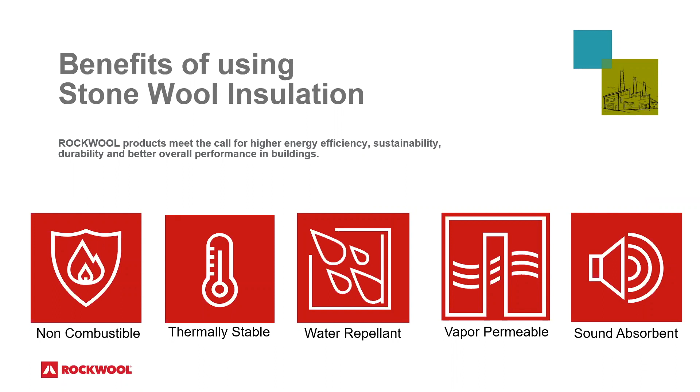When it comes to stone wool insulation, which we're going to talk about once this program starts, really the low hanging fruit of the benefits here is the non-combustibility aspect. As we're starting to build bigger buildings, we have to be cautious of using combustible materials. Stone wool insulation compared to some of the foams out there has a great statement around non-combustibility - no flame spread, no smoke development. But in addition to that, it's a very thermally stable product, maintaining its R-value over the life of the building. We'll get into water repellency and the importance of vapor permeance, which is critical for high performance buildings like passive house buildings, particularly here in the Northeast, to allow these buildings to dry. And then the acoustic qualities - sound absorbency of stone wool insulation is quite good, and we'll get into why that is as we go.

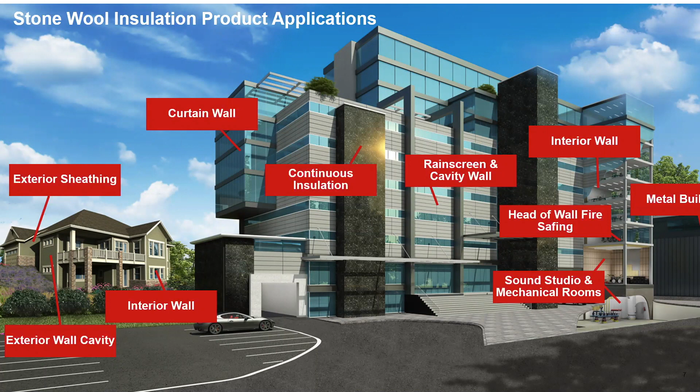Just to be clear, you guys might be familiar with all the various applications for stone wool, or you might not. It's not just a batt insulation that we use - we're actually able to manufacture semi-rigid and rigid products that can apply to all sorts of applications on buildings, from continuous insulation boards to curtain wall assemblies to acoustic semi-rigid boards for metal buildings or sound studios, as well as rigid boards for low slope roofs, as well as under slab below grade foundation walls. So there's a lot that you can get into with stone wool, and we'll get into that here in a second.

Rockwool has been around for quite some time. We started in the 1930s in Denmark. We opened our first facility in North America in 1988. And now we're just breaking ground - or I should say we have broken ground - on our fifth manufacturing facility. It'll be open next year in Ranson, West Virginia.

So we're the leader in stone wool insulation supply globally, and certainly here in North America. But we'll have some more product discussion at the end of the presentation.

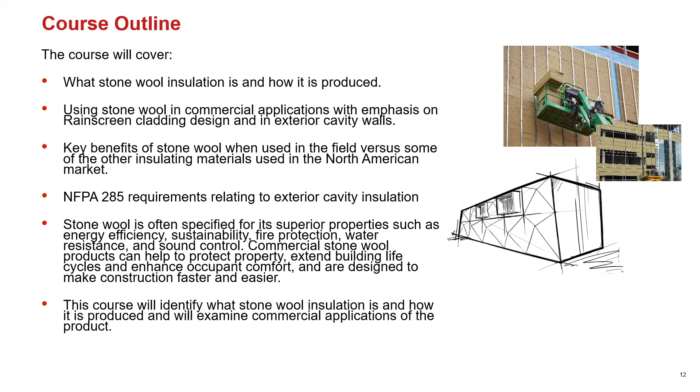All right, so again, this is kind of like a 101 on stone wool. We're going to talk about what is stone wool, maybe clarify the difference between what we call stone wool and what you might recognize as mineral wool, and what those differences are. And then we'll get into the attributes and the benefits of why you might want to specify stone wool versus some of the other products that are out there in the market.

And we'll get into some applications, in particular exterior wall applications and roofing applications, which I think is, for the most part, the most pertinent to commercial insulation as it pertains to passive house applications.

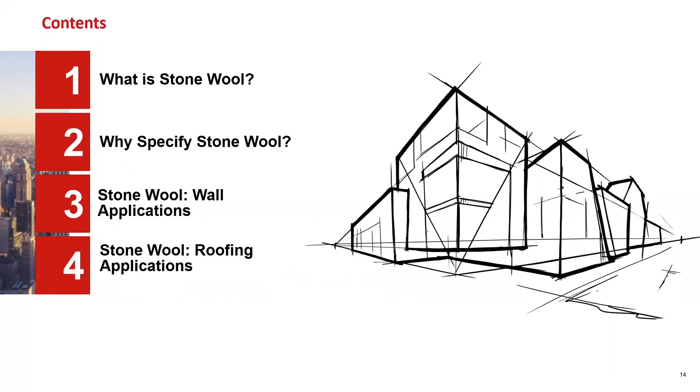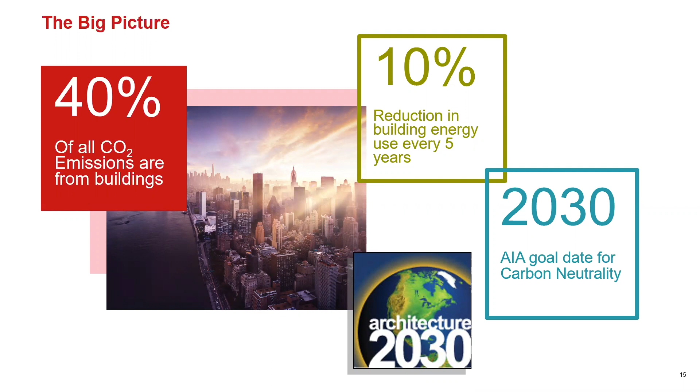Buildings need to be the primary focus, and that's going to include not only new buildings, but also existing buildings, right? So most of the energy use is coming from our existing building stock. So I think retrofit is going to be a big topic here, if you're not aware of that already, that we need to be thinking about.

But when we think about optimizing air tightness and adding insulation to create a passive approach and high performance building, we do need to think more than just climate change as it pertains to reducing energy use and reducing the impact of carbon emissions.

I mean, there's a lot of things going on in our environments today, from tornadoes, floods, fires, all sorts of durability challenges and issues need to be addressed through the selection of products and materials to also help meet those energy goals. And so when you look at insulation, particularly commercial insulation, you have various types that you can consider.

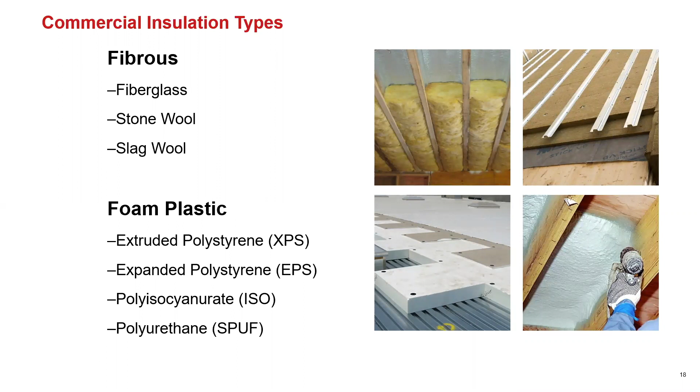And we'll categorize the two main typologies as fibrous insulation, which would include your standard fiberglass, stone wool and slag wool, right, in the mineral wool segment. And then you've got foam plastics, which could have rigid boards like XPS, EPS, polyisocyanurate, or you could look at the spray foam class, like open cell or closed cell spray foams.

And so quickly looking at rigid foams as a selection for products in buildings and commercial buildings for continuous insulation. In general, these are closed cell type products. They do use blowing agents, whether or not we're looking at polyisocyanurate, expanded polystyrene, or EPS or XPS, and the blowing agents will vary, right?

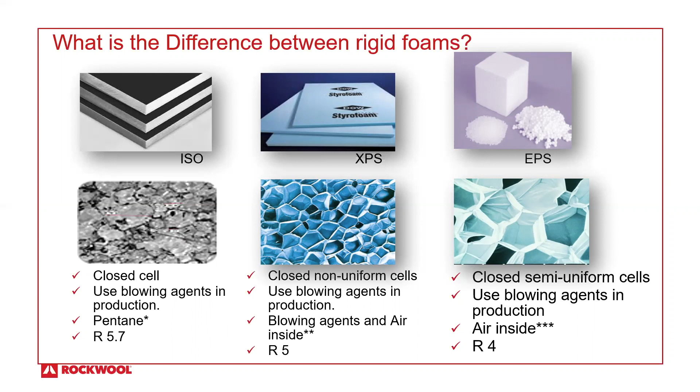In polyiso, you're looking at a pentane gas, that's going to get you to about an R5.7 nominally. You have blowing agents and air inside of XPS. You have some air in the EPS products that'll get you to about an R5 and 4 respectively. So I think the key thing here is to notice that these are nominal R values. We're going to get into really the focus on effective or long-term performance R values as we go.

And so when you look at stone wool, what is stone wool? And to again try to demystify things, we'll create the umbrella review here. So a mineral fiber is the generic term for any sort of fibrous inorganic substances, and that mineral fiber can then be classified into three groups.

So one is fiberglass, which I think we're most familiar with. The pink low density products that you'll see quite often in between studs, wood studs, sometimes metal studs.

And then you have the category of mineral wool. Under that category you have 2 subcategories, which include stone wool and slag wool. Stone and slag are the 2 primary ingredients in a mineral wool product. The differentiator here is if you have more stone basalt rock within the makeup of that product, it's considered a stone wool. If you have more slag, then it'd be considered a slag wool.

Slag is the byproduct of iron ore when you're producing steel, so that's really the recycled content. It's a little bit different in terms of the makeup versus the basalt rock. We just want to categorize and showcase the differences.

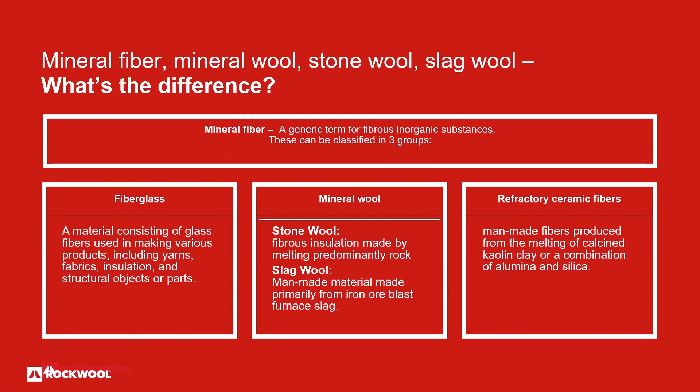So what we're going to be talking about today is more in the stone wool segment than in the slag wool segment. The third overarching category is refractory ceramic fibers, which are high temperature insulation materials often used in industrial applications for piping and things of that nature. It's rare that you'd see that as a specified product in commercial insulation, so really the fiberglass and mineral wool products are where we start our focus.

I traditionally have a video to show groups. Decided not to include that in this presentation because it's a little lengthy and can get chopped up in the transition to Zoom. I might forward that to you guys afterwards, but it's a video from the Discovery Channel that showcases how the mineral products and stone wool products are made. I'll just go over it here quickly.

So I mentioned the combination of raw materials of basalt rock and steel slag. You basically heat those up to the point of melting, so it does get to some high temperatures. Then as that stone slag combination starts to melt, it's spun into fibers. It's not too different from the production of cotton candy, but in this case we're looking at stone.

Those fibers can be collected into either lower density bats or into higher density boards. We'll get into the specifics on why we'd do one over the other and how those products are used.

You want to look at the individual products and make sure they're right for the application, the specification. Typically products that are going to interface water are going to be either semi-rigid or rigid - they might have specific binders to interface better there. The lower density products like bat insulations are usually meant for interior applications, so you don't want to mix those two up.

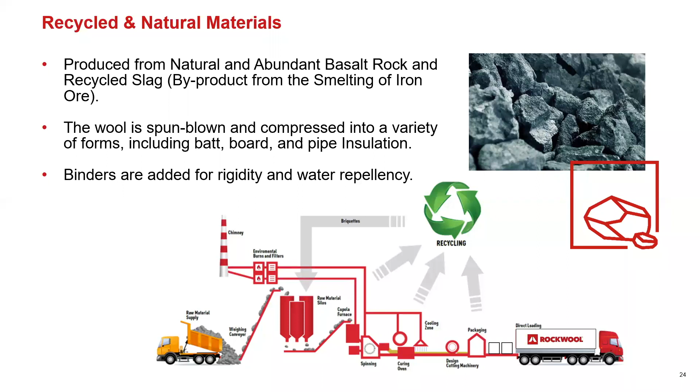But on this line here, one of the benefits certainly is that any product that falls off the line can then be thrown back into the raw material silos for production. So very little waste to landfill in the production of stone wool insulation - basically all the material can be recycled back into the production line.

There's a number of different applications for stone wool in the commercial realm - from curtain wall assemblies, fire safety at edge of slab, trying to meet UL rated assemblies for these curtain walls, which we don't see too much on Passive House, but there's certainly still a lot of it going on. We can use it for metal building, for standing seam metal roofs, for low slope roofs, and for continuous insulation on the outside of traditional rainscreen walls, masonry walls, things of that nature.

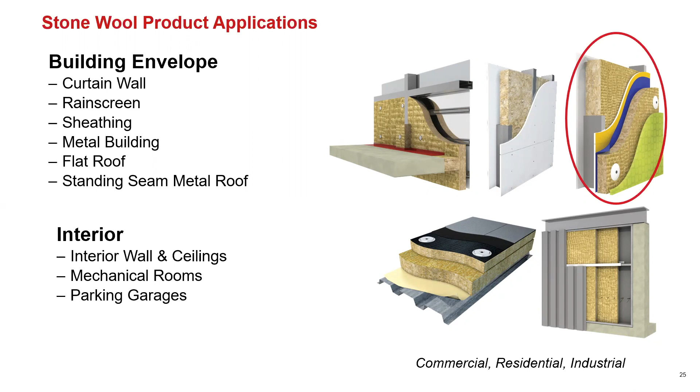On the interior, we can also do walls and ceilings, mechanical rooms, parking garages as well. A lot of those are specified for acoustical or fire reasons, and there's a lot of good data around that in both commercial and residential as well as industrial uses.

So why would you want to specify a stone wool insulation? There's a number of reasons. We're going to start with fire, which we've mentioned already in terms of fire resistance. For those of you who don't know, stone wool insulation is fully non-combustible.

There's zero flame spread and smoke development with stone wool products, whether we're looking at batt insulation or board insulation. So when you start to compare this product to some of the other rigid foams or spray foams or even fiberglass, stone wool will melt eventually.

It melts at 2150 degrees Fahrenheit, and that takes about 6 hours in a full-on fire to get to that level. So it offers a tremendous amount of protection for occupants of buildings that either need to shelter where they are or get out of the building, giving them time to do that.

It also protects the contents of buildings and things of that nature. So when you start to compare it with some of the other insulations on the market, it's not a surprise why people are starting to move towards stone wool insulation for building construction.

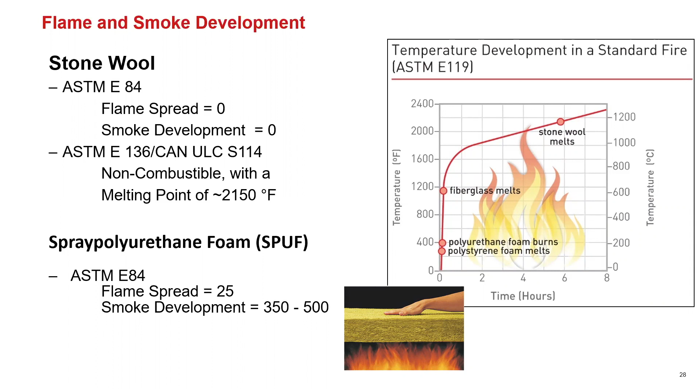In the commercial realm, I think a lot of us are familiar with some of the high-rise catastrophes that have occurred over the last decade or two with the use of foam plastics on the outside of buildings, and that could either be rigid foams, polyiso, spray foams, or even panel materials that you're specifying that might be combustible or have foam core materials.

But at the end of the day, there were, I believe, 72 fatalities, which were all due to smoke inhalation in this particular building. So as a result of this fire, the UK has banned the use of combustible foam plastic on high-rise buildings, as well as the use of combustible claddings.

And so now we're starting to see a movement in Northern Europe to use only non-combustible materials to achieve the requirements. And even here in New York City, the FDNY has started to pursue some more stringent guidelines around the use of foam plastics on high-rise buildings.

So it's in the process of review as we speak, but I think there'll be some information coming forward fairly shortly. In general, in commercial construction, we oftentimes reference an assembly test called NFPA 285.

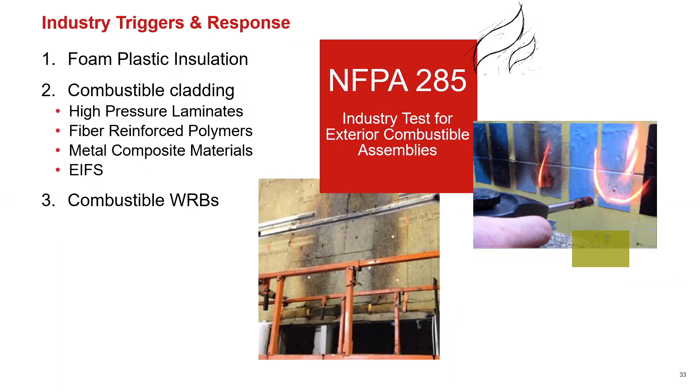And this is what that test looks like. It's a multi-story burn test, as I mentioned. I spent a number of years with a manufacturer of HPL cladding on the technical side, so I have a lot of experience dealing with this. I'm happy to answer questions at the end. But it's a complex test and quite expensive.

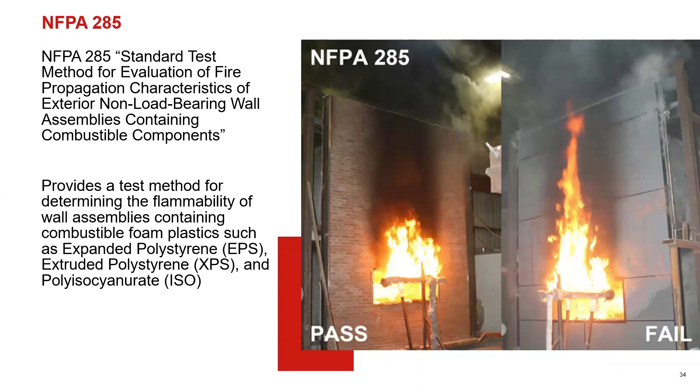So we've seen a movement towards non-combustible insulation and non-combustible cladding to avoid those types of test assemblies. But it's referenced here in chapter 26 of the IBC. And it's not just NFPA 285 that needs to be considered.

You also look at fire resistance rated walls, ASTM E119. You do have to use thermal barriers, and there's also flame spread and smoke development testing required with foam plastic insulation, which is not as critical with non-combustible materials.

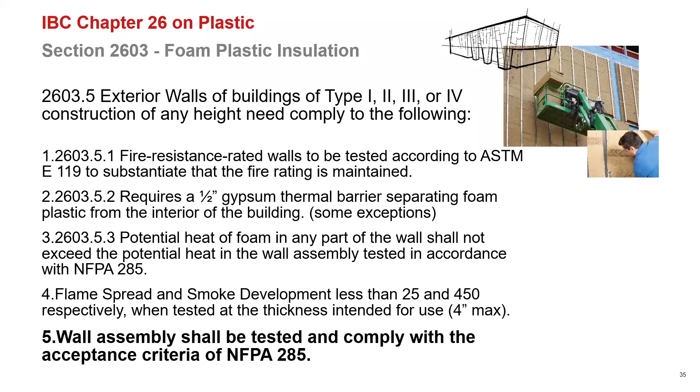So I have another video, not the one I'm referencing now, comparing polyiso to stone wool. But I thought this video was a little more relevant. This is from the UL Fire Service, given all the forest fires we've had in California and other areas of the country.

There's been a renewed focus on wildland-urban interface testing. This compares two walls: a vinyl siding wall over XPS insulation on top, and a similar vinyl siding wall over stone wool rigid insulation on the bottom. This was prompted by wildland-urban interface concerns, especially in California, where requirements for continuous insulation are increasing, raising concerns over how that integrates with fires and the use of foam plastic.

So what we're looking at here is, they started a fire at the base of each wall and measured the time it takes for that fire to enter the attic space of this wood frame construction building. We've had to push the stone wool clock fast, because after 30 minutes they ended up shutting the test down without the fire really moving past the vinyl siding.

But with the XPS wall above, in just under 3 minutes it enters the attic space, and they have to diffuse it and put the fire out. So you'll see right at 3 minutes. It's an interesting visual on why, from a fire perspective, there's been a movement toward non-combustible insulation, and I think we'll start to see these tests referenced in a lot of the codes moving forward.

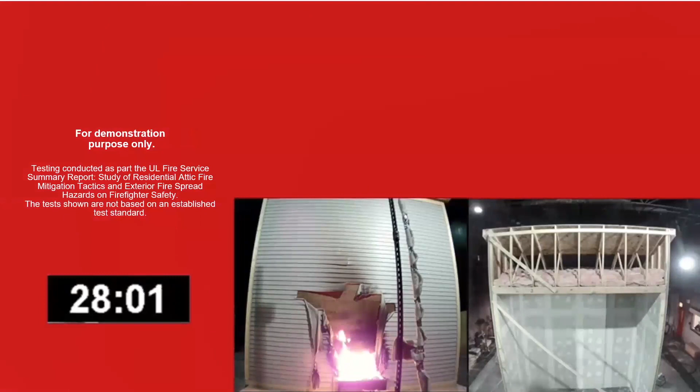All right, moving on from fire: long-term thermal resistance. Stone wool insulation is a fibrous insulation, and we consider it a very stable R value, with trapped air in the fibers helping make up the R value. A semi-rigid stone wool insulation used on the outside of buildings is roughly R-4.3 per inch, and that'll be true today and 80 or 90 years from now. There are no blowing agents, no off-gassing that's going to create any modification in that.

Now compare that to some foam insulation products on the market, particularly polyisocyanurate or XPS, which do use blowing agents, as I mentioned before. They will off-gas over time, which isn't great for a variety of reasons, but from a thermal perspective you'll see a drop in nominal R value with polyisocyanurate—up to 20%, sometime between year 2 and 20. With extruded polystyrene it's about a 10% drop, which doesn't drop them to awful levels, but it might not be what you're expecting from the specification side.

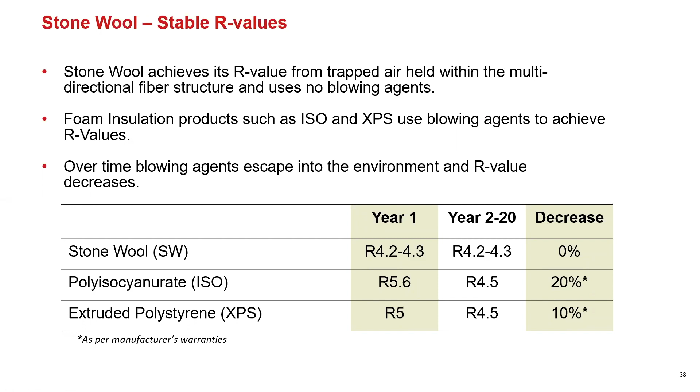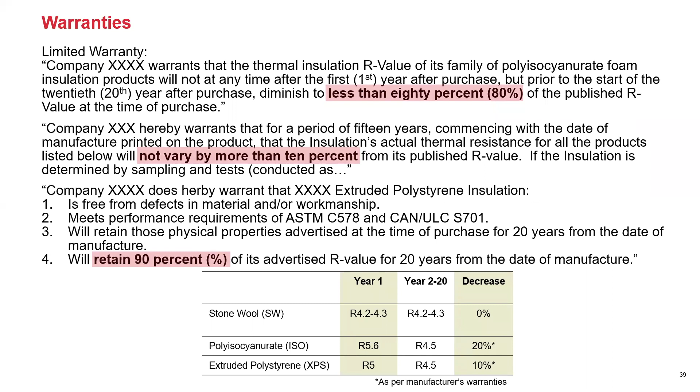As we look to make sure these buildings perform to our expectations for more than 20 years, we want to understand the long-term performance values of these products. It shouldn't be a surprise—it's in the warranty terms for a lot of manufacturers of rigid boards—but it's just something to be aware of when specifying products.

Additionally, temperature-dependent R values. If you're not aware, nominal or published R values for any insulation product are taken at a very static 75 degrees Fahrenheit in a hot box test. So those nominal R values tell you very little about how a product actually performs at different temperatures.

The one outlier is the polyisocyanurate, which at about 55 degrees Fahrenheit starts to decrease down to about 4.3, 4.4 R per inch at 0 degrees.

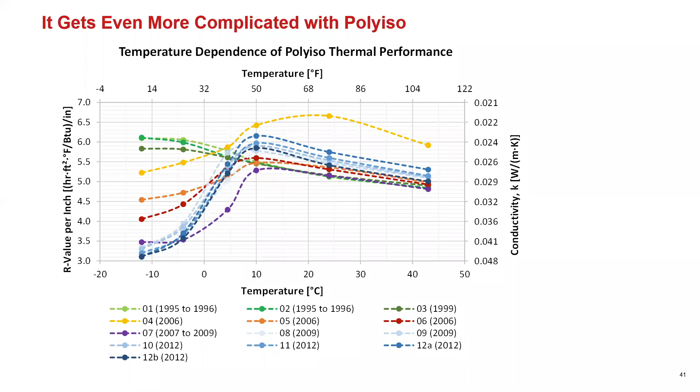So what does that mean? If you're considering stone wool versus ISO on the exterior wall for continuous insulation, you might be looking at an ISO board that's 5.6 nominal R per inch when published versus a stone wool insulation that's 4.3 R per inch, nominal R value at 75 degrees Fahrenheit.

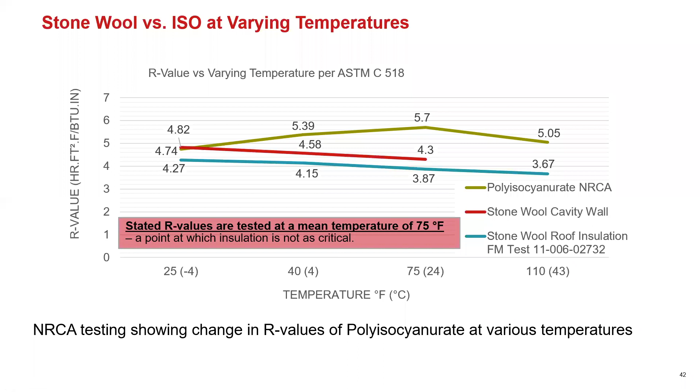However, when we drop to 25 degrees Fahrenheit, the stone wool insulation is actually outperforming the polyisocyanurate insulation as those temperatures start to drop. So it's a dynamic scenario we all need to be aware of - R values are not static, and there are things that can impact them.

Another item around stone wool insulation is in-field performance and flexibility. When we call a product semi-rigid, that's usually in the 6 pound per cubic foot range of stone wool. There's enough flex on that, even though it's a little rigid, that you can conform to radial applications, curved surfaces, and stone wool can do that quite well without leaving any gaps for convective looping behind the insulation.

We oftentimes see in these unique buildings where architects want a little bit more design freedom, but also need to meet the requirements of continuous insulation, stone wool tends to be a good option here versus some of the more rigid products on the market.

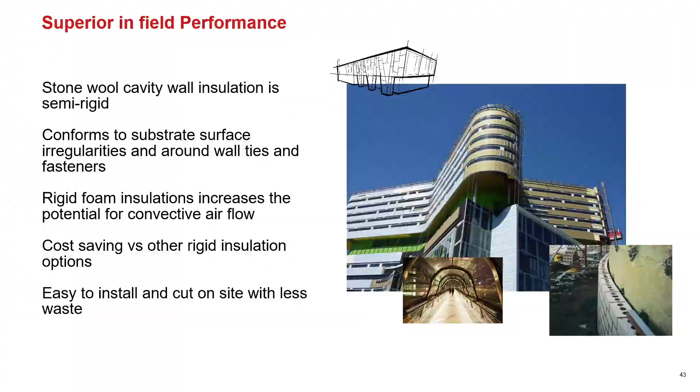All right, so now moving on to dimensional stability. Like all materials, stone wool is going to have some level of expansion and contraction due to thermal shifts. This is no different from other structural materials like concrete, steel, or rigid insulations. But what's important to note is that stone wool moves very, very little - the foam plastics are moving 12 to 20 times more in terms of expansion and contraction versus stone wool.

So what's the big deal about that expansion and contraction? Normally I ask the audience what we see here - I'll let you know in case you haven't guessed it, but this is convective heat loss. This is a building in the Northeast that has a polyisocyanurate roof, and during the cold winter months, the board starts to contract and create these gaps between the boards.

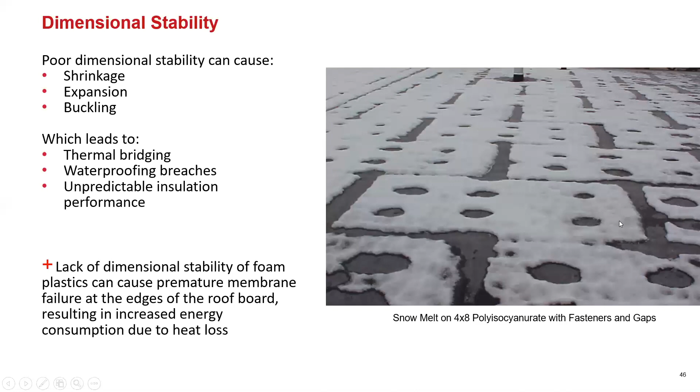And so the heated interior environment starts to leak through those gaps and starts to melt the snow on the roof. You can also see some mechanical pins that are creating thermal point bridges here as well. This means you're losing effective R value of the assembly by allowing that convective heat to come through, but you're also creating a lot of wear and tear on the roofing membrane due to that expansion and contraction. So the more we can protect that and maintain a stable R value, the better off we're going to be. Stone wool helps to promote that.

So stone wool is hydrophobic, particularly the products we're using on the exterior of buildings. We're looking at moisture absorption under 1%. It can create a very effective drainage plane. Normally when I'm presenting this live, I try to pour some water on samples so you can see it bead, but this is visually what it would look like.

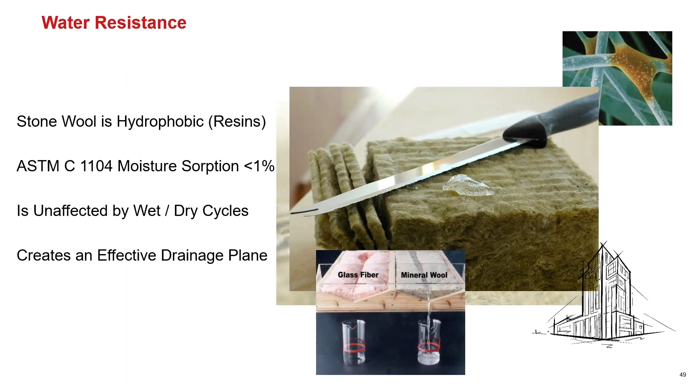You'll often see rigid boards used for foundation walls or under slab because of its ability to deflect and defer water. One thing I want to note is that because trapped air makes up the R value within the insulation, if you put this product under a constant head of water, a hydrostatic head, it will eventually take on water. The water goes through the gaps in the fibers, so it's not absorbed into the fibers. But what's beneficial is how quickly the water can drain through - if you saturate a board for 30 minutes, within 12 hours it's completely void of water.

It's important to note, as you're comparing this to other insulations like fiberglass, a stone wool batt insulation could get wet on a job site, and you let it dry out, and its R value is retained, its structure is retained, and you can still use the product. So again, it has some really good water quality components even for the batt insulation.

All right, moving on to vapor permeance. It's important to note that stone wool is not a vapor barrier - it's not going to trap vapor. It's roughly 30 perms in terms of promoting drying capacity within walls. That'll vary a little based on the thickness of the materials you're specifying, but it really does help maximize that drying potential. As we should know, a good wall design, particularly in the Northeast, should not incorporate two true vapor barriers.

We typically want to see, if we're going to have a vapor barrier like a membrane product, it should be located on the warm side of the wall. Here in the Northeast, where we heat our buildings more than we cool them, at least for now, that vapor barrier should be on the inside of the wall. So what that means is if you're doing split wall construction like we see here with some batt insulation in the studs, you've got a true vapor barrier to the inside of that.

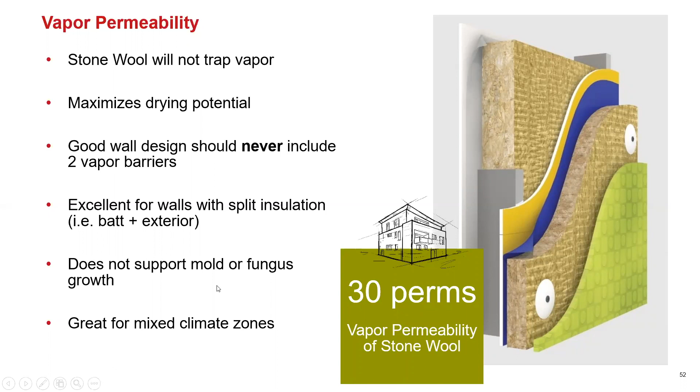Additionally, stone wool is not going to support mold or fungus. It's a completely inorganic material, and it's really good for mixed climates. This is what we want to avoid, where in the Northeast we're trying to deal with that cold climate and allow heat flow through our walls. If we specify an XPS or polyisocyanurate for better R value considerations, we might be overlooking the fact that it's vapor impermeable and compromising drying capacity of our walls.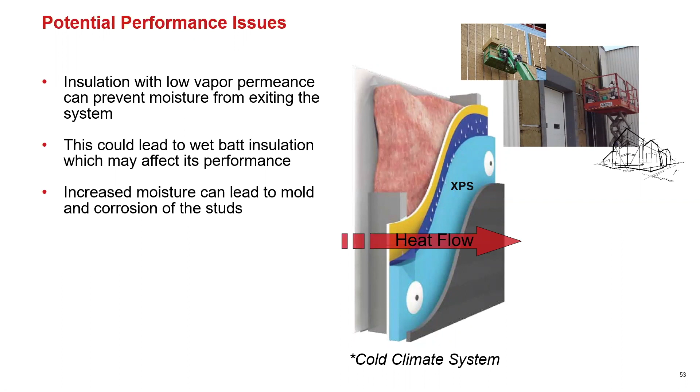So again, we want to look at using an interior vapor control layer, having maybe a vapor open stone wool batt insulation or fiberglass insulation. You've got your sheathing, a vapor permeable air barrier, a semi-rigid stone wool insulation, exterior continuous insulation, and then you've got your cladding. This is kind of an ideal way to design for vapor permeance and drying.

Just to identify this in the passive house realm, passive house buildings are being built extremely airtight and adding lots of thermal insulation. Historically, we built buildings that weren't very thermally efficient or airtight, so they'd get wet in driving rain, we'd put a fire on the inside, and we'd rapidly dry out the wall components because of air leakage and lack of insulation. As we build more thermally efficient and airtight structures, we can't rely on that heat flow as much to dry things out, so allowing for diffusion becomes really critical in high performance walls, especially in passive house type buildings.

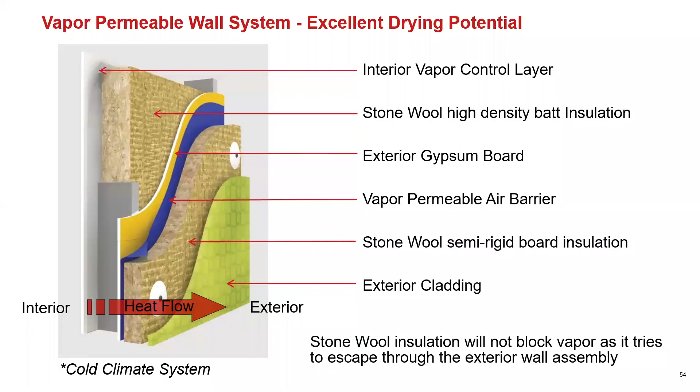All right, I'm going to move on to sound absorbency. I'll be the first to admit I'm not an expert on sound, but I'm going to try to play one right here. We've got a lot of good folks behind us to help support this.

Acoustics is complex. There's no single product that manages it all. It's oftentimes a system that needs to be considered.

The ratings you're typically referencing are STC ratings, the sound transmission class, tested in accordance with ASTM E413. The range of frequencies measured through STC is roughly 125 to 4,000 hertz, and the STC rating is a decibel reduction average across that spectrum of frequency. Just because a product has a high STC rating doesn't necessarily mean it's the best for the application, because you should be looking at what frequencies within the STC rating you're concerned with, since certain products might perform better at lower or higher frequencies.

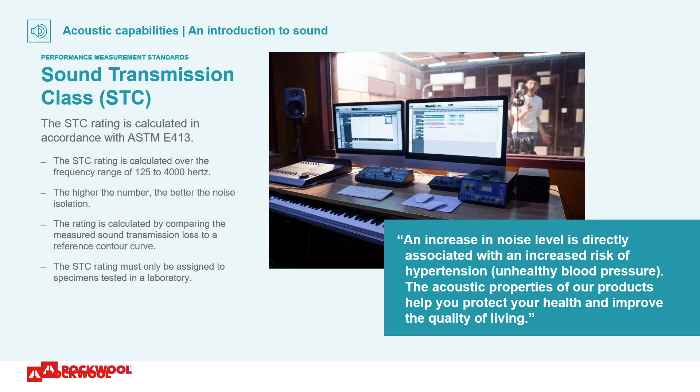So not to create complexity, but if you're very focused on acoustics, sometimes it takes a deeper dive. There's also OITC, the outdoor-indoor transmission class, which you may or may not be familiar with. STC is often used for exterior walls, but OITC is more commonly referenced. The difference is OITC calculates the average over frequencies in the range of 80 to 4,000 hertz, so it gets to lower frequencies within the rating, taking into account airplane sounds, trains, and anything at lower frequency becomes part of the OITC rating. That's why you see a difference there.

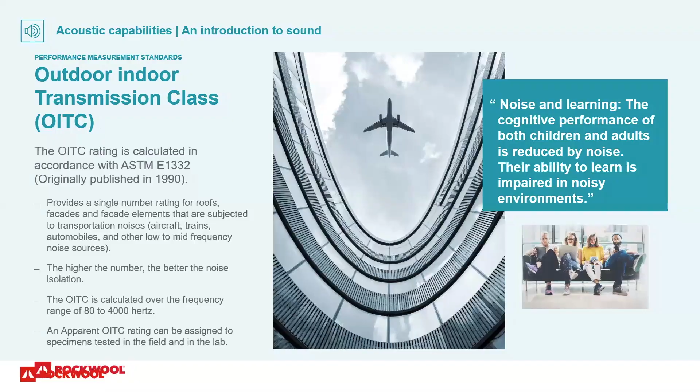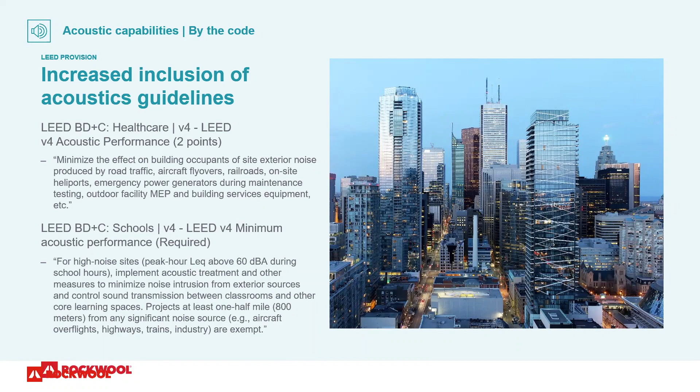Depending on how you're specifying and what projects you're on, like LEED, or healthcare, there's now starting to be requirements around STC and OITC, and schools as well. Controlling sound is a big challenge that needs to be addressed for our learning environments. That's where we're starting to see them referenced most, and certainly around large infrastructure projects, particularly airports, you often see OITC ratings and a movement toward higher ratings and reduced decibel noise in these types of arenas.

We often see stone wool specified in areas that require high OITC or STC ratings, and really it's a function of the flexibility in production. I mentioned before there's trapped air within the fibers of the insulation, and because stone wool can be produced at different densities, it can create different levels of airflow resistance to meet requirements for reduction of specific frequencies. At lower frequencies, you can have specific products that address that, or specific products manufactured to address higher frequency sounds.

You can also add surface protection, membranes or other treatments to the surface of the product to help control sound that way. As mentioned, density helps, but also importantly is fiber diameter and fiber orientation. You can control within production to have cross fibers or line fibers, depending on what you're looking to achieve.

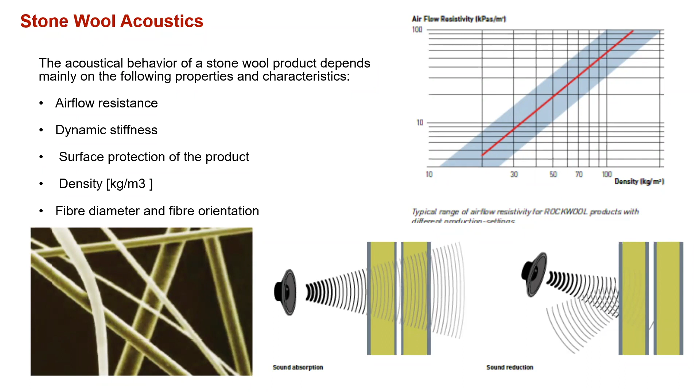As you have denser products, you have higher airflow resistance, which can be better in terms of managing sound reduction versus sound absorption. This is a chart showing different densities of stone wool fibers, and you can see that by changing the density, you can address certain frequencies differently. So it's important to look at that.

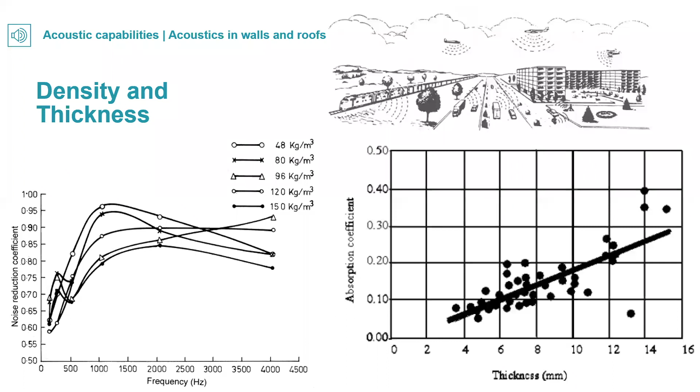Usually there is a point of diminishing returns on thickness, but as you make thicker insulation, it does tend to help, though there is an end point. I forget now what the thickness is, but we can look at that if there's questions.

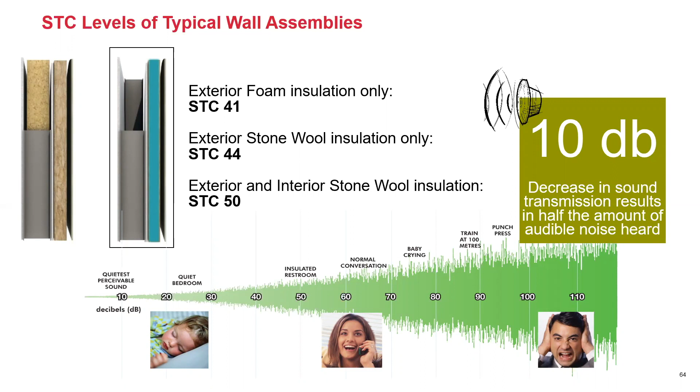That difference between STC 50 and roughly STC 41 with foam is close to a 10 decibel difference, which basically equates to reducing audible noise 50%. So 10 might not seem like a lot, but it really reduces the amount of sound coming through an assembly. Every STC value does count, and it's something we're seeing much more considered of late.

When it comes to using batt insulation for acoustics purposes, stone wool tends to be a more dense product than fiberglass, so it naturally has a bit of an improvement with regards to STC. It's going to fit better as a friction fit between studs, and there's no slumping or clumping that you'll sometimes see with glass fiber insulation. So it does help contribute to a better fit.

Moving on to sustainability, which I think is a hot topic for this audience. With regards to stone wool, it is a natural renewable resource. There is recycled content up to 40% that comes from slag-based materials. The stone is a very abundant natural resource, so it's not something that's scarce.

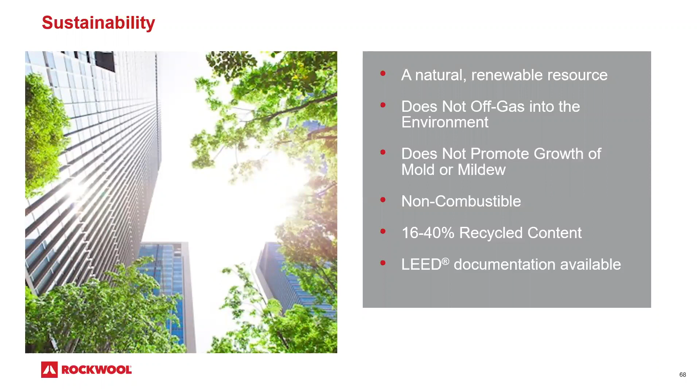That has a relatively decent statement compared to some of the foam plastics. There's no off-gassing into the environment with stone wool, and no promotion of growth of mold or mildew. If you're looking for LEED documentation, stone wool manufacturers have that available as it relates to indoor environmental quality, air quality, materials and resources, and energy and atmosphere. Those are the key categories that can be addressed with stone wool.

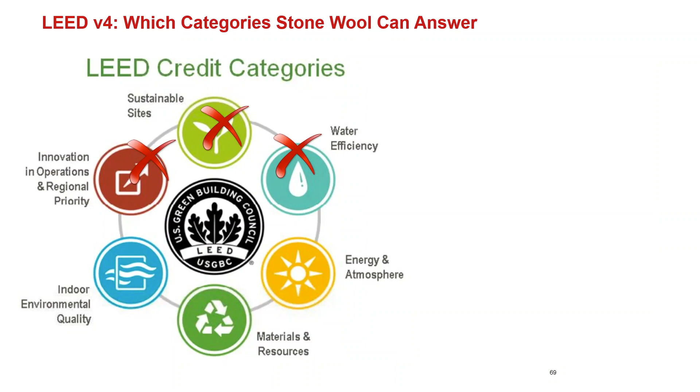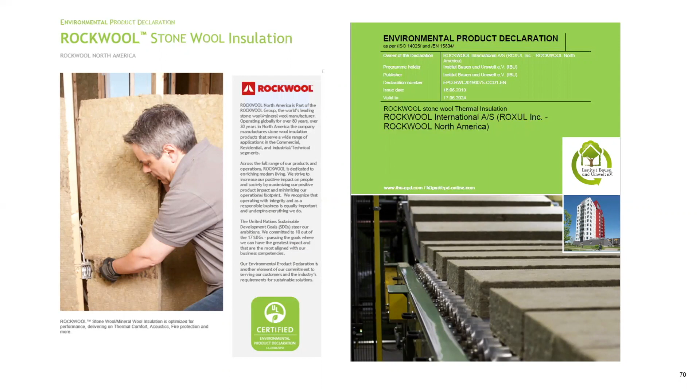There are EPDs available through the North American Insulation Manufacturers Association. NAIMA has generic EPDs as well, but certain product manufacturers might have their own EPDs that get into the specifics and might dive into cradle-to-gate type applications, getting a bit deeper into embodied carbon.

Carbon emissions is a big deal. For typical buildings, operational carbon is huge, and there's still embodied carbon we need to recognize. As we get to high performance buildings, everything decreases, but the impact of embodied carbon becomes much more relevant. So when we're looking at meeting carbon emission goals by reducing energy use in our buildings, we can't forget that the materials we're specifying also need to not use up a tremendous amount of carbon to do their job.

Here's a chart, I think from Architecture 2030, comparing and contrasting different insulations on the market and how they impact with their embodied carbon. There's a host of products, rigid foams and spray foams up top. Mineral wool and fiberglass tend to be at the middle of the chart, and then you get into wool, dense packed cellulose, and some of the more hempcrete and straw bale products at the bottom, which are carbon positive or carbon negative. So mineral wool tends to be right in the middle.

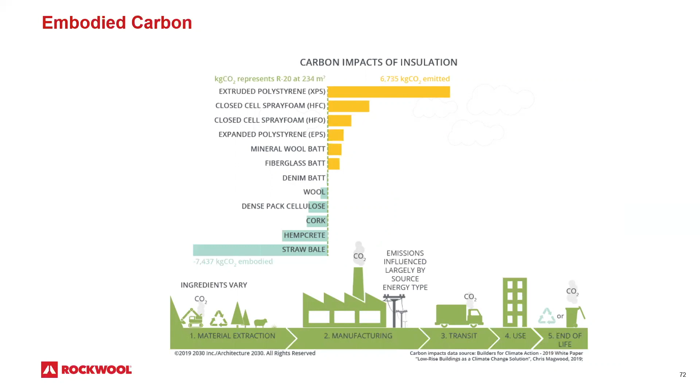So as you're looking at commercial insulation, you have to take into account other things like fire performance and durability. It tends to be a good choice for those types of commercial structures compared to some of the foam plastics. But not all mineral wools are the same - we've talked about stone wool versus slag wool. Slag wool tends to be considered the recycled content of a mineral material, which many people look at as a positive, which I would agree.

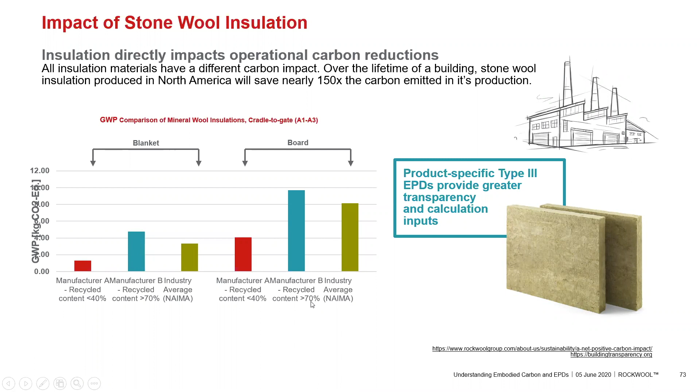It's good to have recycled content, but having more recycled content doesn't necessarily mean you're going to have a better carbon emission standpoint. These are just comparisons of manufacturers that might have less recycled content but a lower global warming potential than some products with higher recycled content in that mineral wool realm. So you do want to look manufacturer to manufacturer as it relates to carbon emissions, but you also want to look beyond just carbon emissions.

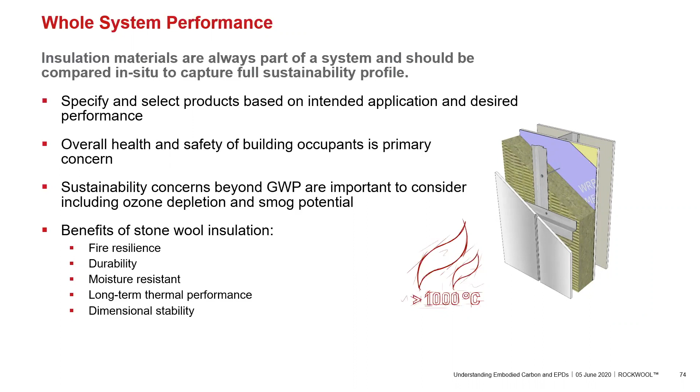I think we all need to be thinking in that capacity, but we also need to select and specify products based on the intended application and the desired performance outside of that. Overall health and safety of building occupants is a primary concern, so fire and durability need to come into the question as well. Just because a product might have a better statement around global warming potential doesn't mean it will have a better impact with ozone depletion and smog potential. We can't get stuck on just one element — we have to look at the bigger picture of the application and the other environmental impacts materials might have in the environment.

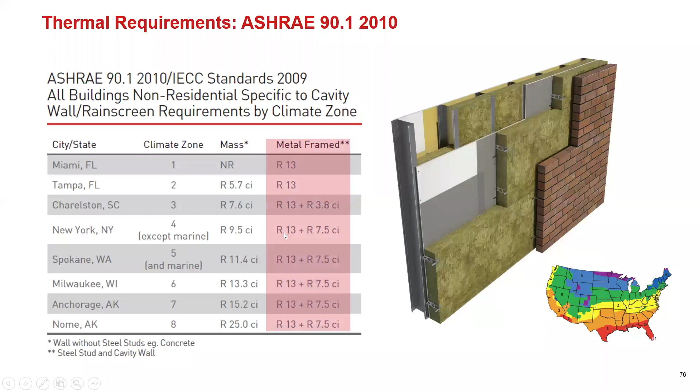I'm going to go through a couple of applications with stone wool that I think are relevant to commercial passive house. The first is exterior walls. You can address and meet code requirements on split wall insulation with stone wool batts, as well as semi-rigid stone wool products for the outside of a wall. Here we're looking at climate zone 4, trying to meet R13 and R7.5 per ASHRAE 90.1, and we could do that with stone wool.

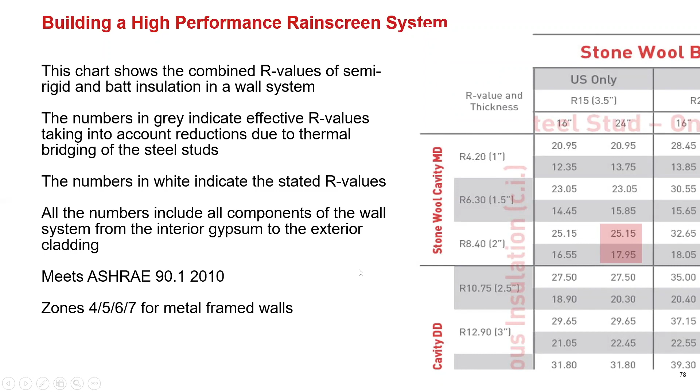You would typically need 3.5 inches of stone wool batt insulation to get to an R15, and then 2 inches of stone wool to get to an R8.4, which would exceed that 7.5 requirement. It's important to note that will get you a nominal R25.15 value, but the effective R value is going to be about R18. We can't forget that when you're stuffing batt insulation between metal studs, that's going to derate your overall assembly — you've got thermal bridges there that need to be accounted for.

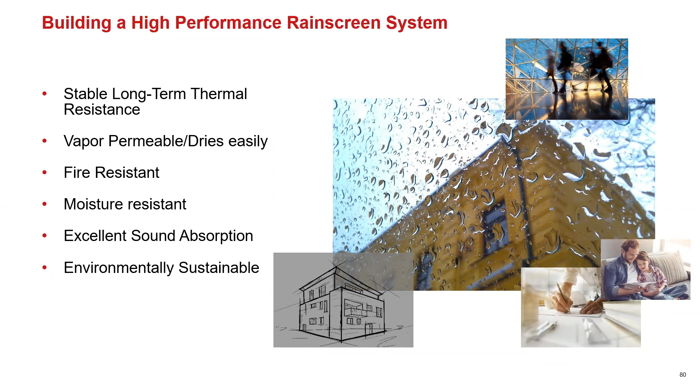But in general, with a single layer of batt and a single layer of board, you could get up to R50 nominal — we've seen much more than that. In fact, now we offer 8 inches of semi-rigid board and 8 inches of batt, so we're getting up to R60 plus, and from a passive house perspective, where you double up boards, we've seen much higher. This helps from the vapor permeance standpoint, the acoustics, and the fire standpoint. So you're getting a long-term stable R value, vapor permeance, fire resistance, moisture resistance, excellent sound absorption, and a relatively environmentally sustainable outcome.

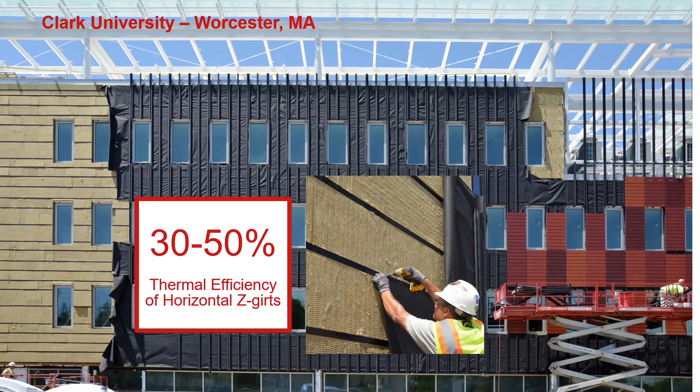What we can't forget when applying the semi-rigid or rigid products to the outside of the wall is that we can't have too many thermal bridges to help support our cladding. In this case, we're looking at a rainscreen using a horizontal Z-girt continuously through the insulation on the outside of the wall, and this linear thermal bridge, at 2 feet on center, is dramatically decreasing the overall effective R value — now down to maybe 30% of what it could be. So we want to see a movement towards more thermally broken systems, with less material bridging through the insulation.

This is a system from a manufacturer called Envelope, where they have clips and rails. If you're just having the clips penetrate the insulation, you're starting to see a much higher performing assembly — in this case up to 75%, although they now have clips that can span slab to slab and are getting up into the 90-95% effective range. So you definitely want to think about those solutions, as well as fiberglass solutions — there are manufacturers that make fiberglass clips like this. This was a passive house in Hoboken through Nastasi Architects, where they used 8 inches of semi-rigid stone wool between the thermally broken clips, getting a pretty high level of R value there.

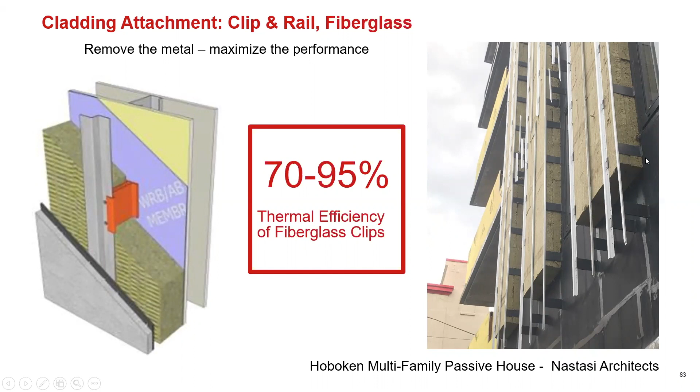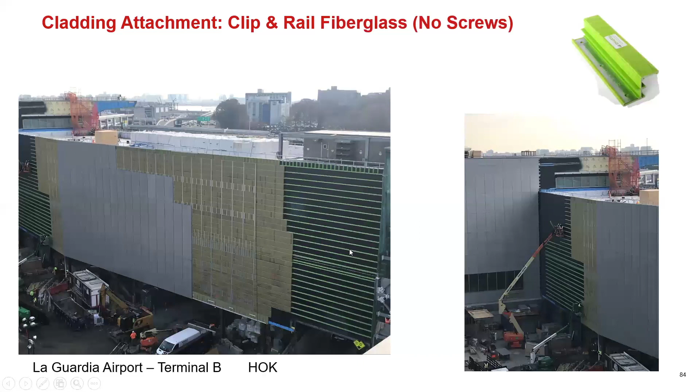And then there are pultruded fiberglass components as well — more like Z-girts made out of fiberglass. Fiberglass is a lot less conductive, and that was used at LaGuardia Airport's Terminal B, where they had 5.5 inches of stone wool through these thermally broken girts to get to some pretty high levels of performance.

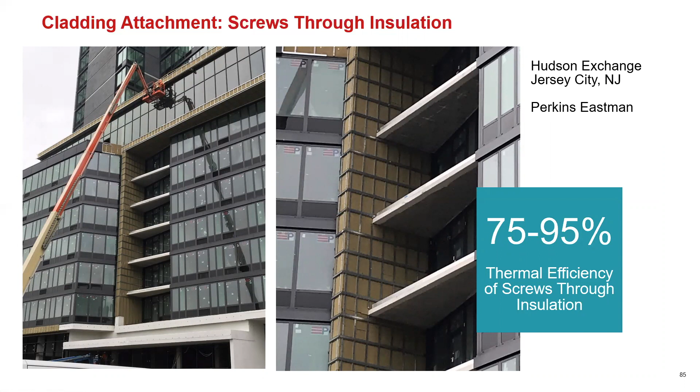And lastly, there's also high density stone wool insulation. As opposed to the semi-rigid products, these are rigid boards about 11 pounds per cubic foot, rigid enough that you can actually screw through them. So you don't need Z-girts, you don't need clips. The only thing penetrating the insulation in this condition would be the fasteners for the cladding extrusions.

And then lastly, stone wool roofing applications. Some of you might not be familiar with it, but there are even higher density products manufactured by stone wool manufacturers, in the 15 pound per cubic foot range, used on low slope roofs. They're rigid monolithic, and they are dual density, able to provide higher compressive strength with that dual density, kind of a snowshoe effect on the roof itself. It helps to eliminate the need for coverboards, which is really great.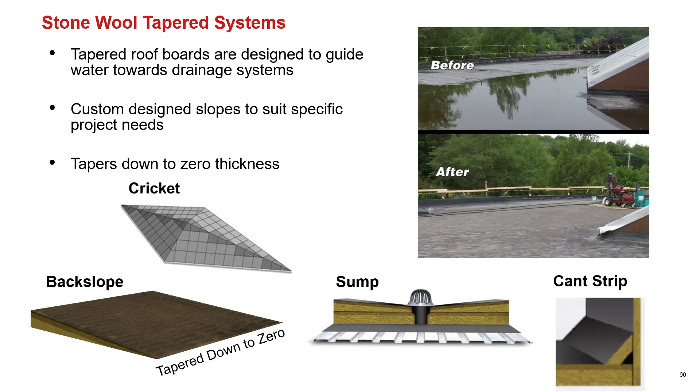It's really easy to cut and manufacture these. These are done just after production to get to the tapers that you need for your projects, and you can create thermally broken cant strips. So lots of interesting opportunities there.

Similar to the walls, the value here is the dimensional stability, the long-term R value, fire resistance, impact, water, and sound. We oftentimes see these products specified in industrial applications where fire is paramount for having a non-combustible roof. We also see it specified around airports where sound is the primary focus. But I think we do recognize that, at 3.8 R per inch, we're hard to compete with polyiso.

So the marriage of stone wool and ISO can work. These are hybrid solutions we're commonly seeing specified, where the ISO might lose its R value at lower temperatures, or expand and contract due to temperature shifts. If you're able to actually insulate the polyisocyanurate, you keep it at a temperature where it can really maximize its nominal R value. So by putting a coverboard or a top layer of stone wool insulation that's dimensionally stable, you're then able to really maximize the overall performance of the roof.

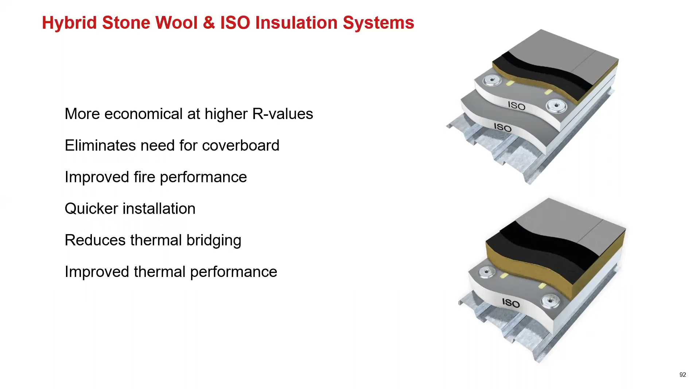These types of assemblies are warranted through a variety of membrane manufacturers, so they're out there as opportunities. We've seen it in New York City - this is on the Empire State Building, where they used this hybrid solution from a sustainability perspective as well as a fire perspective, the two driving factors there.

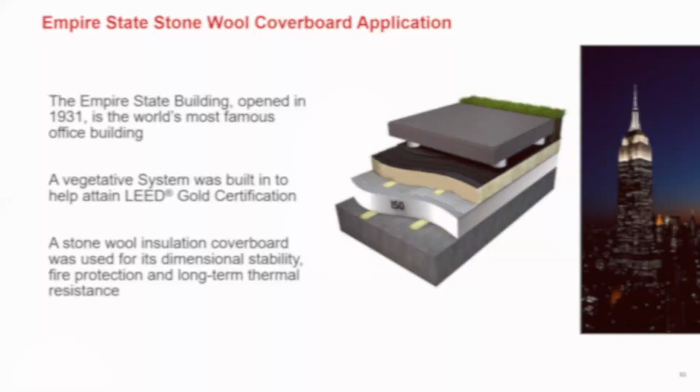I saw some questions regarding availability of the product. Okay, can I buy it at Home Depot? Can I buy it at Lowe's? Or how do I get that stuff?

Yeah, so to answer that one, for residential applications, we are available at the box stores. We commonly have our Comfortbatt, our batt insulation, as well as our rigid boards, our Comfortboard 80. If it's not in stock there, you'd be able to ask the help desk at the box stores to get those products. From a commercial availability standpoint, we're pretty ubiquitous at the major commercial distributors of insulation and membranes within the city. So I'm happy to send you a list of who has our products available. They might not always be in stock, but some of the more common products like Cavity Rock, Comfortbatt, and AFB are pretty readily available.

Todd, are you familiar with a comparison? 475 has a video comparing EPS and Rockwool and Gutex. I'm not offhand familiar with it. Is it comparing by R value or embodied carbon? A performance measured temperature field test. Okay, I don't know if it's comparable R values or just comparable thicknesses. Yeah, I'd have to take a look, unfortunately, but I'm happy to look at that after the program and respond to the inquiring party. Yeah, links in the chat.

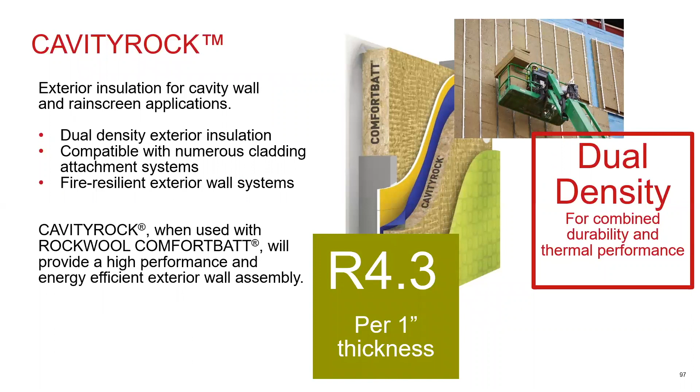Just quickly, Rockwool has gone ahead and executed certified passive house details through PHI. So we have some really good literature and brochures around that, as far as guidance to meet passive house requirements with stone wool insulation. In general, we commonly see a product called Cavity Rock, which is our semi-rigid R4.3 per inch, used on the outside of buildings. We also now have, for those who may or may not be aware, a black-faced Cavity Rock.

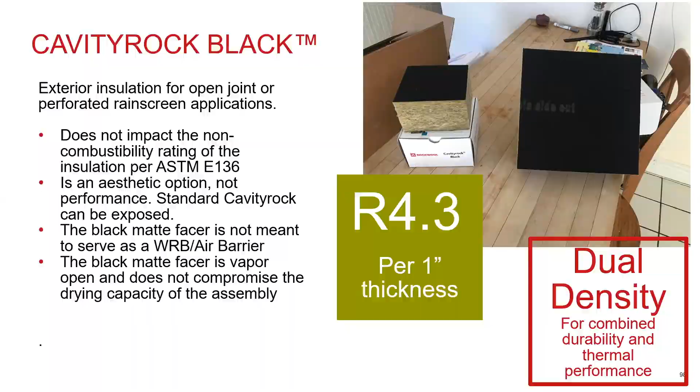The Cavity Rock was used on the Cornell Tech building here in the city that you guys might be familiar with, which was one of the largest passive house buildings at its time.

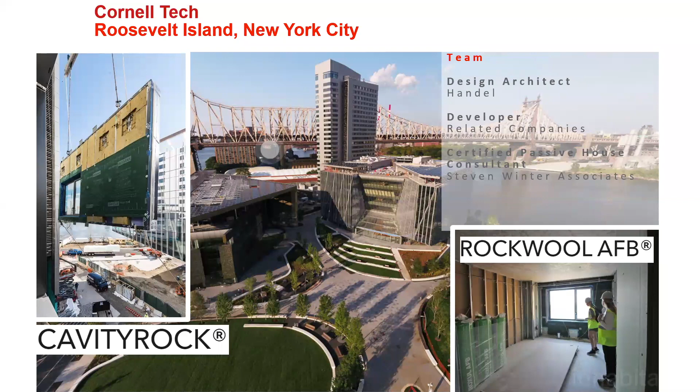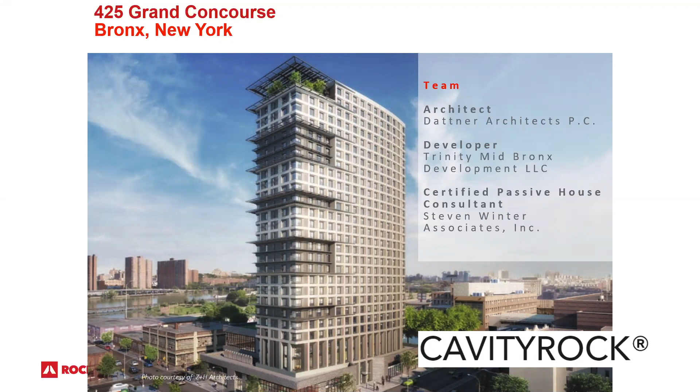Some upcoming projects where stone wool is the basis of design or involved in the specifications: this is the 425 Grand Concourse project with Dattner Architects. They've broken ground. I'm not sure where things currently sit on the Sendero Verde project, which is going to be, I think, the largest by volume passive house in the world, like an entire city block, for those who aren't familiar with it.

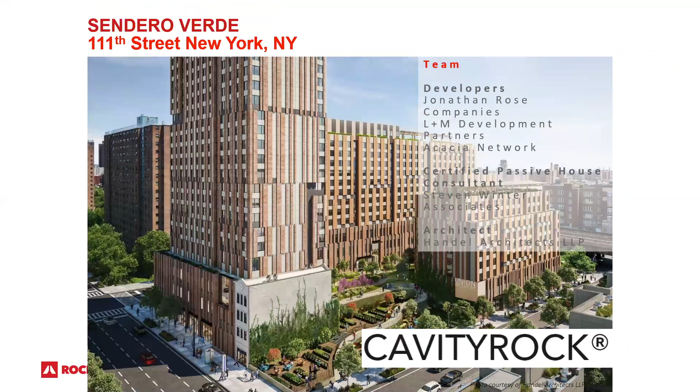Stone wool is also being considered for the Winthrop Center up in Boston, which will be the largest passive house in the city of Boston moving forward.

Beyond the Cavity Rock product, we have a rigid product for continuous insulation as well. This is the Comfortboard 110. Its sister product is the Comfortboard 80, which is a little bit lower density, but either one can be used as continuous insulation.

Both of these products have the strength to transfer the cladding load through the high density insulation back to the structure. By the ability to apply your cladding without thermal bridging, the effective R-value of the assemblies is increased.

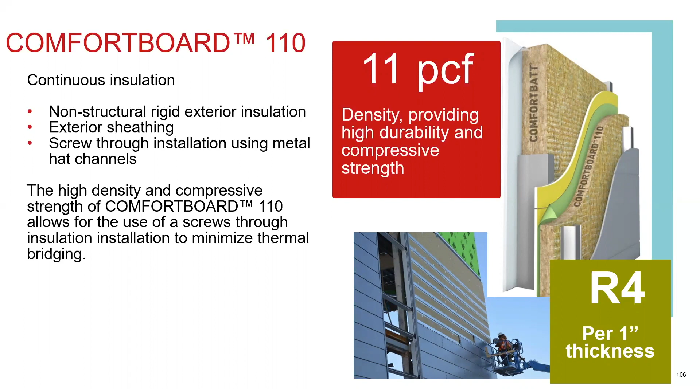We're seeing this specified on the passive house up in Hanac Corona Senior Housing Facility in Queens. It's also being considered for specification on the Magnuson Architects project, DeKalb Commons, which is on the books.

Just quickly with Rockwool tools and support - I mentioned we have Passive House certified details. You can visit our site for this information. We have a really great guide around that to give you a sense of how to approach that. And even more importantly, we have some really great building science services that are fully complimentary.

A lot of folks in New York are using this, so you may have already been aware of it, but we can run effective R-value calculations. We can showcase the ability for your designs to meet the code requirements, the ever-changing code requirements in New York - if you're going beyond prescriptive, we can certainly help here.

We also have the ability to run dew point calculations and WUFI modeling, as well as run 2D and 3D thermal modeling of thermal bridges as well.

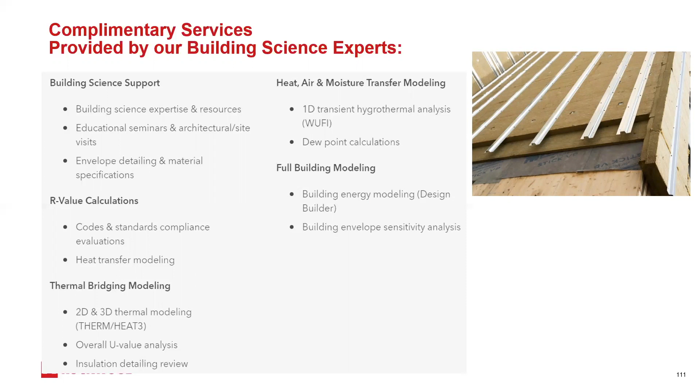If you guys are working on projects where you really want to hone in on these details, don't hesitate to reach out. Again, it's a fully complimentary service - you don't have to use Rockwool products either. We just recognize that insulation is more than just a nominal R-value. There's a lot of things you guys need to consider, so we're happy to offer these services, and we're pretty quick with turnaround on that.

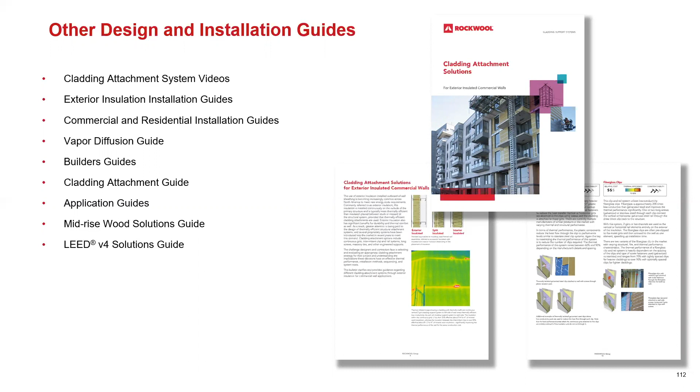And then lastly, we have some really great guides, so I encourage you guys to visit our website and poke around. A lot of good information, from a mid-rise wood solutions guide to a cladding attachment solutions guide, all around trying to maximize effective R-value and address some of the building science challenges you guys are facing every day.